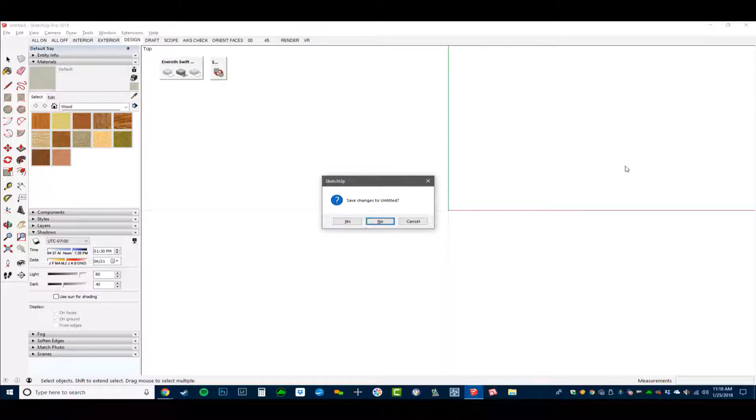Let's hop into SketchUp Pro, and let's see what am I up to. I've got to check my notes here.

All right, so let's open up, I'm going to open a Condoc model. Let's go to our Condoc tools, version 3, resources, models. And we've got this residential new construction. This is kind of a good one.

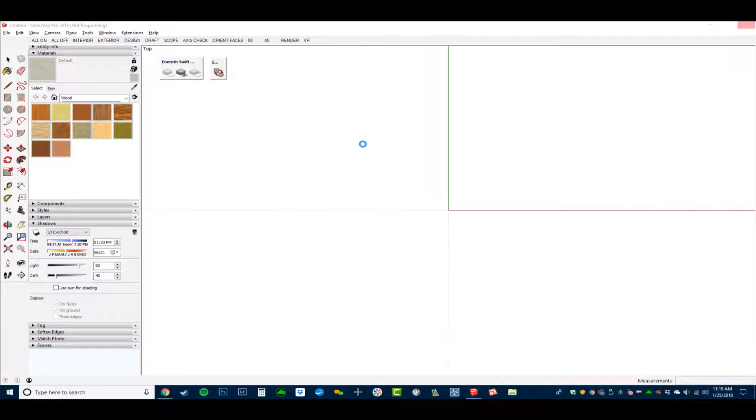You know what, I'm also going to open up another window, and we're going to start off with a demo of Relative Top. I just want to show you what that one looks like. All right, let's get this started up.

Okay, here we are. All right, so the relative top view, and this one was a free one if I remember right.

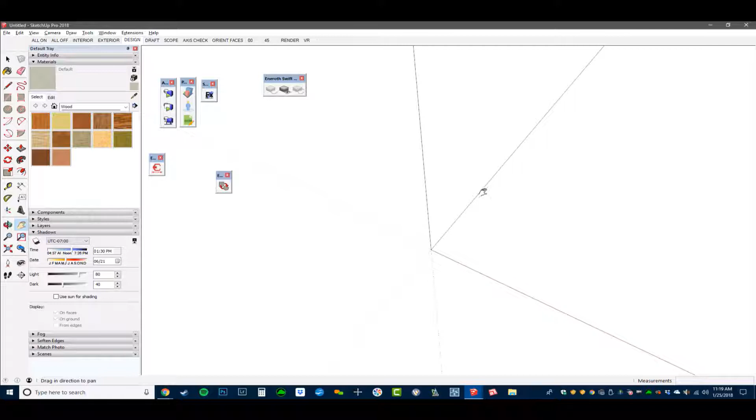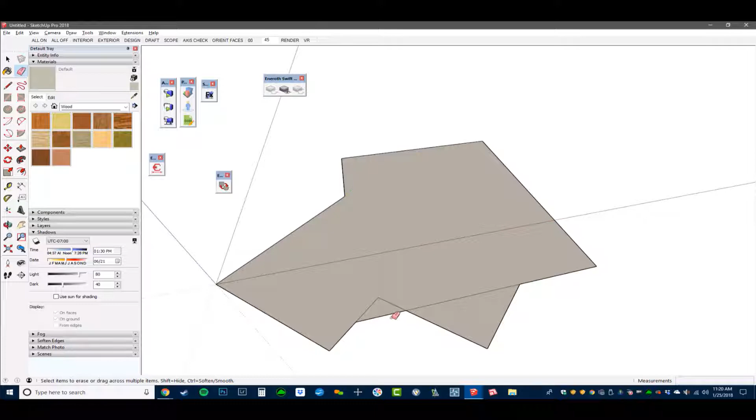Basically what happens is if I start drawing a floor plan like this, and it's going to be kind of masked out like that, and we're going to have a grid shift in here, and put something going on like that, now our plan has all these funky angles on it. And so that's fine, but maybe I want my plan to line up here. If I go to camera, standard views, top, the green is always north, and it's always plan north, so your drawing is always going to point to the top.

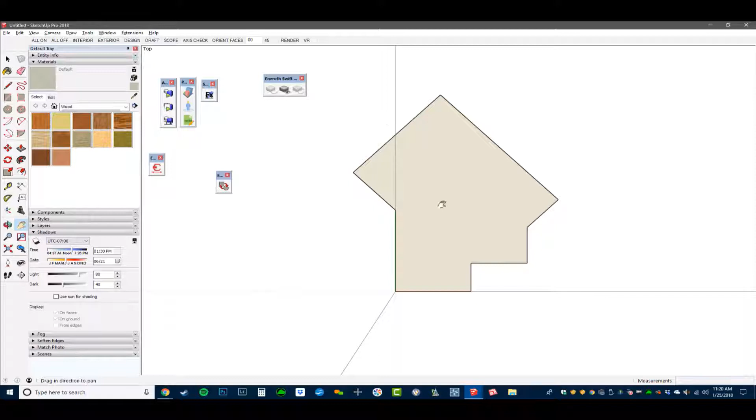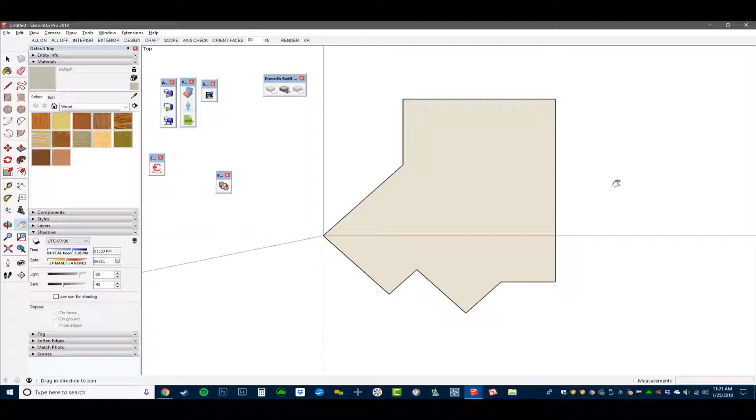Now, what if I want this to be on one of these different sides? Well, the way you would do it in the past is you'd right click and choose move and rotate about the blue by 45, and then right click and choose align view. Now you've aligned your view with that. That's a mess, I don't want to do that. That's even when I know it's 45 - what if I have some really weird angle here? I don't even know what that angle is. So let's just pull this up like that.

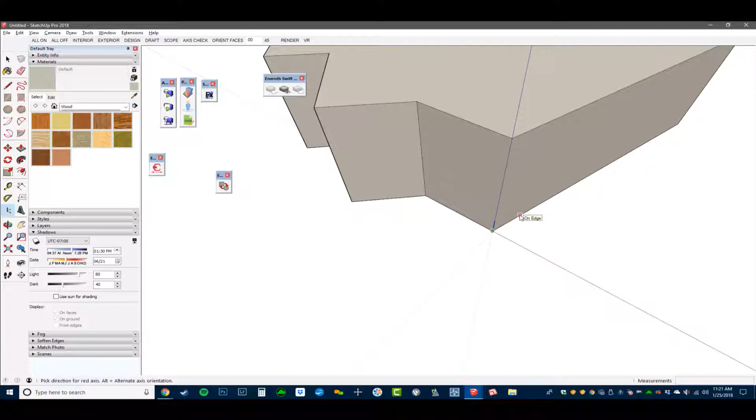All right, so then the other way we would match this is I'd go to my axes tool and set up my axes so that green - see, I messed that up just like I said - so I want to set up my axes to be in line with this face, and now I can right click and choose align view, and now I'm set up in plan. That's just a real hassle, to be honest with you.

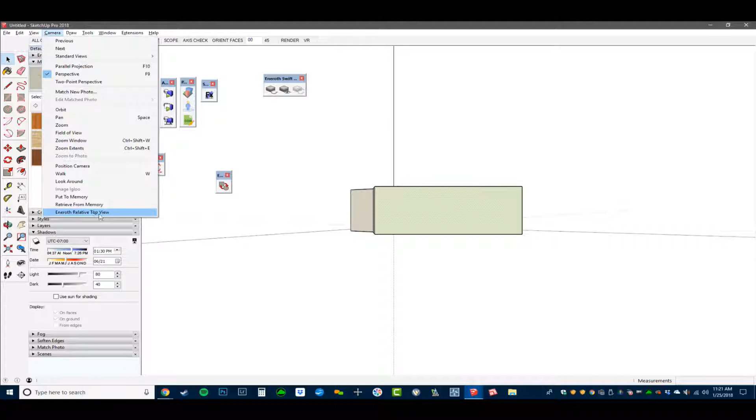I'm going to reset that. I don't want to think that hard. So what I do is I right click and choose align view, so now I've got that perfectly aligned view there. And then I can go to camera and choose Eneroth Relative Top View. What that does is it flips my camera right over, and I'm good to go on my parallel projection.

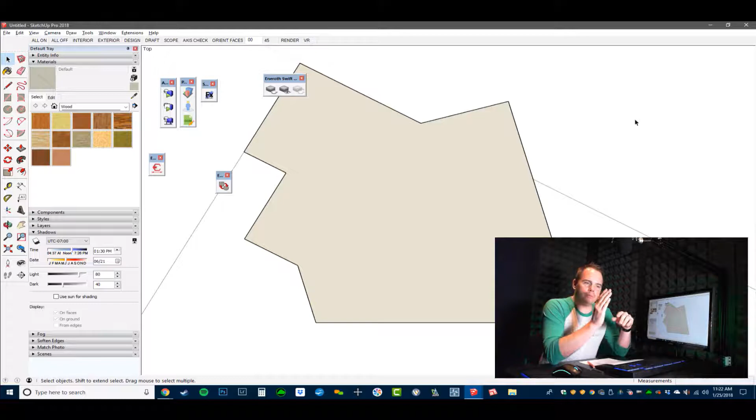At this point, I can add my scene and set up my plans, or if I'm working in Condoc, Condoc works off that default drawing context, so your green is going to point up. Maybe your plan is askew. Well, this way it's really easy to get to that view and then update all of your camera views in all of your different plans. So that's a really handy plugin, one I'm going to hold on to for sure.

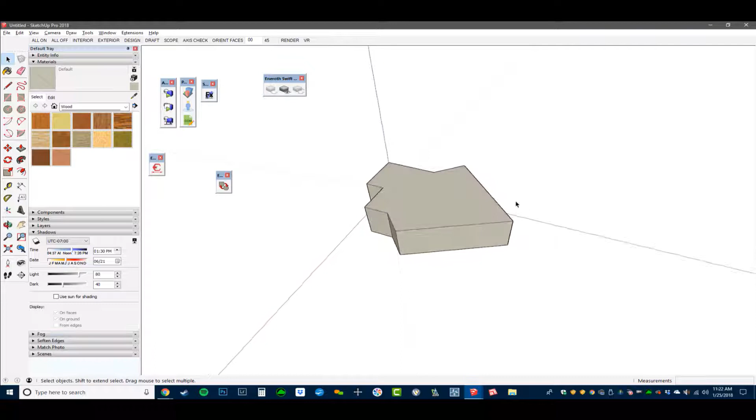All right, let's see what else do we have. Let's see, extensions. Oh, let me install my Condoc extension here for just a moment. We'll do extension manager, install, and v3. There we go, I'm always switching versions here. And like that.

Okay, cool. All right, so let's see, what's next? I want to look at Swift layer visibility. And let's see, I should just take one quick moment and look at the chat panel, make sure that everything's going the way it should be. All is clear, perfect. Okay, I'll go through these here in just a little bit, but for now, we'll keep on going.

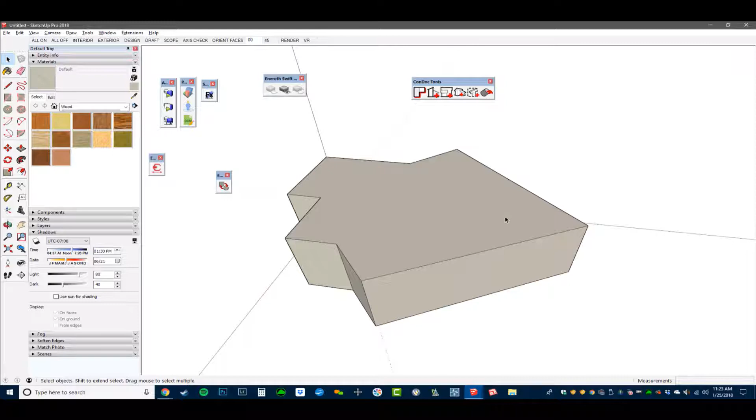Swift layer visibility, this one is $10. This one is really cool. All right, check this out.

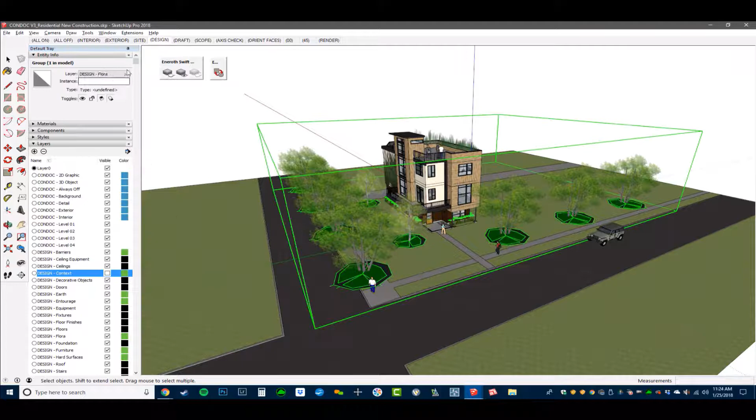If I go in here, here's my context, right? If I look at my entity info, the way that the Condoc system is set up is that we have our design context layer, and we have design flora, right? So I've got to click on it to understand it, that this object is in this group, and the layer assigned to that group is design context. Now, if I want to turn off that layer, I actually have to go into my layers panel, and I've got to go, okay, design context, and turn it off. And then I've got to click here and say, okay, yeah, that's design flora, click here, turn it off.

All right, so what this Swift layer visibility does is I can click on an object and then just push this hide button, and it turns that object's layer off. All right, so that's the first functionality.

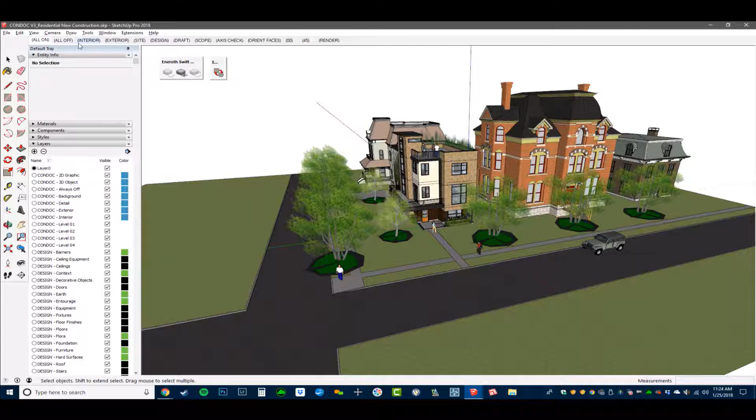So watch this, I'm going to go to all on. These are our layer states, so this works very, very just right in line with our layer states and everything that we're doing with Condoc as far as layering goes. So basically I click here, and then I just click on this hide button. And look what it did, it turned off Flora. I don't care about that now. I don't need to dig around in my layers panel. And I can go click here and say, yep, Earth, turn it off.

Now this is different than hiding. Think of hiding something, you get a similar effect if I hide something, but the issue of hiding is that it's more of like a utility or a tool. It's something to kind of help you move through your model, it's not like a permanent fix. And that's where layers come in. Layers are like the tried and true perfect way of organizing a model. So really, hiding things is like you're going to hide and unhide as you're working. Layers is the way that you fully control your model.

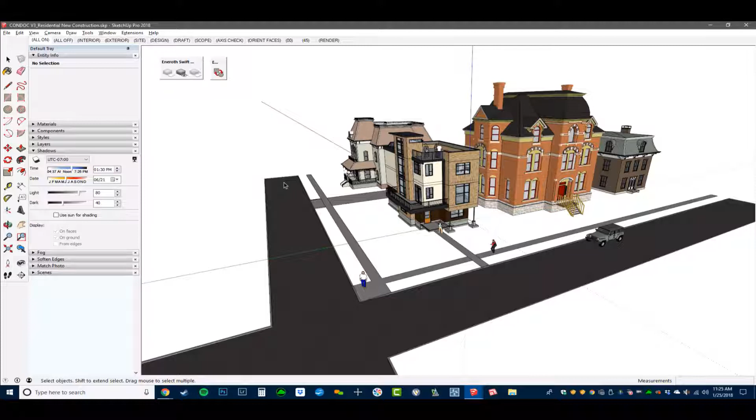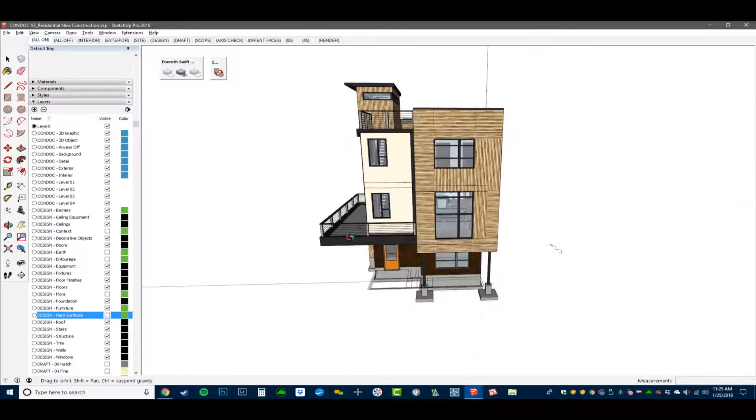So click here, hard surfaces, you can click on context as well. So I picked two different layers, and check this out, I'll open up my layers panel again. And when I hit hide, you can see it turned off context and it turned off hard surfaces. So really easy to kind of get there where you want to be and just work on what you want to see here, all right?

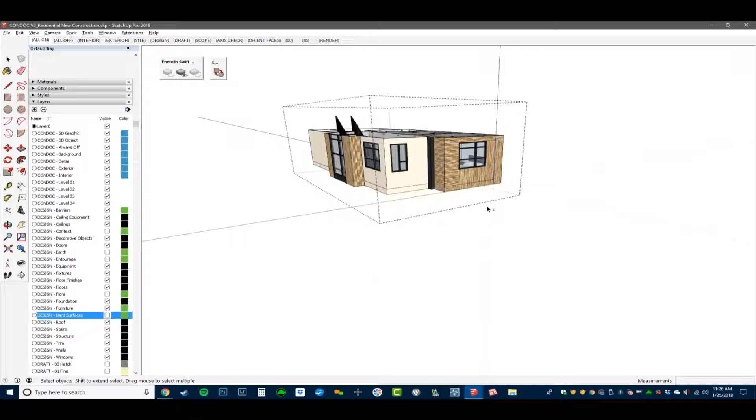Now, the other thing it does, and this one, as far as demoing goes, I might muddle through this because I'm just really, it clicked for me just about 2 hours ago, the real value of these other buttons. So basically what you can do, if I double click in, I like to use hide rest of model, all right? So I use that a lot. Let's just click here, let's click on, this is our walls, and I'm going to hide my walls. And then I can use hide rest of model to isolate the rest. And then I could say like, I want to hide my windows as well.

And what that's doing is, those layers are kind of trickling through all of those different levels. It just helps me control those layers, get inside my model, get to the layer I want.

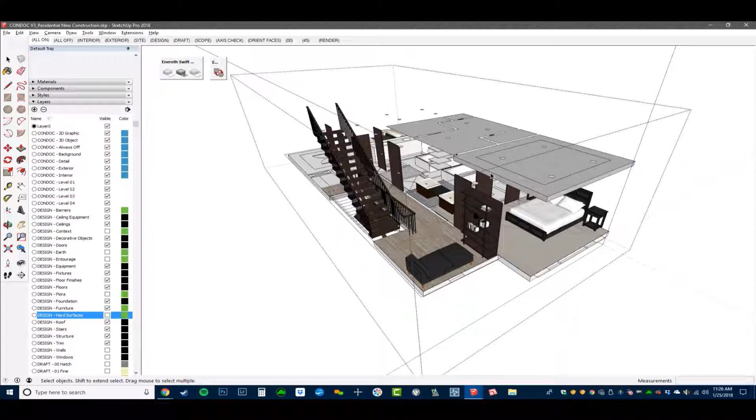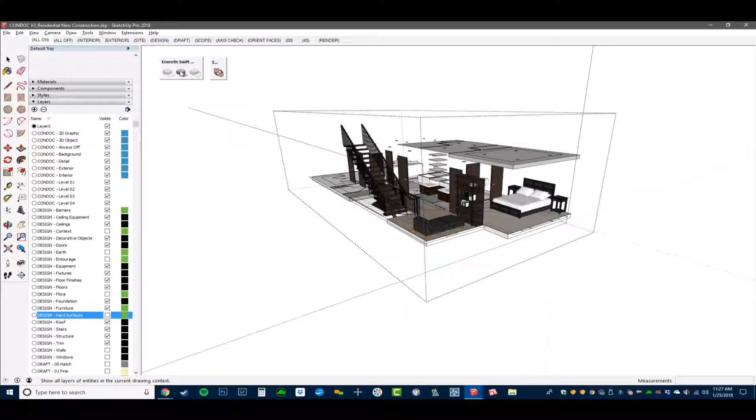Now there's this other function, let's see what this button does. We've got a lot going on with my graphics card right now so it's not showing the prompt right, but I'll do this from memory. Basically, it's going to unhide all of the layers used within this drawing context, which is this group I just double clicked into.

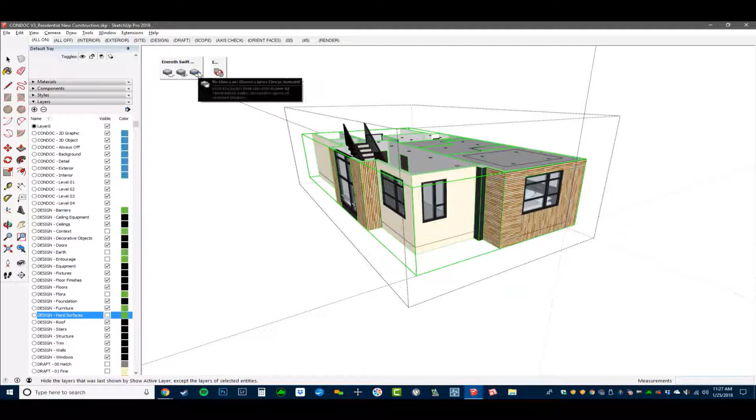Now let's say I actually did want to work on my walls. I click on my walls and then click on this button. What this does is it rehides everything that was shown, except for what I selected. So now it rehid all of those other layers, but kept the one I selected.

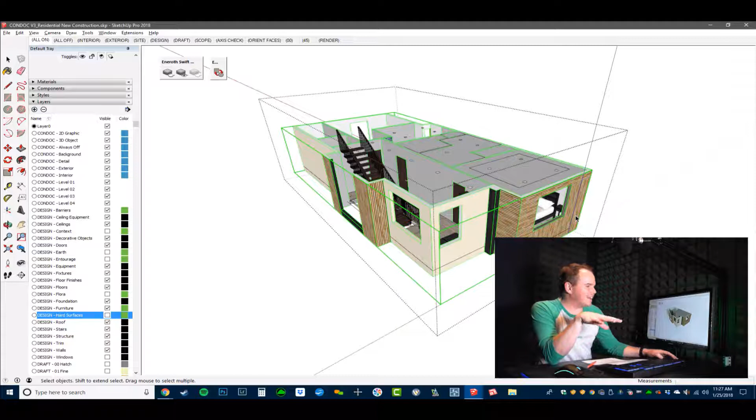It probably takes a little practice to get used to, but Christina mentioned this changed the way she works, and I can see how that would be true. This is definitely well worth the $10 just for this one trick. I'm psyched about this one.

Let's do this. Let's go to Window, Preferences, and our shortcuts, and let's see if I type in, I'm guessing it's like hide layer. Yeah, there we go.

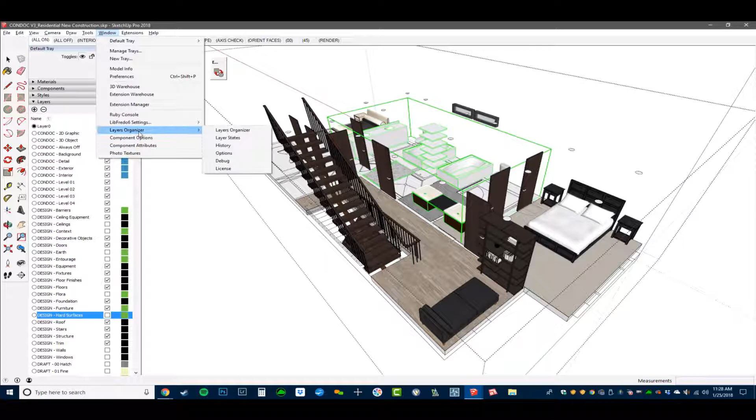Let's see if I can expand that. So hide, rehide, let's see what this tool is called. I've got to look up what this command is. So hide selected layers, let me find that. I'll just search Eneroth. Window, Preferences, and Shortcuts, and let's see if she put her name on here. Okay, hide selected layers, all right.

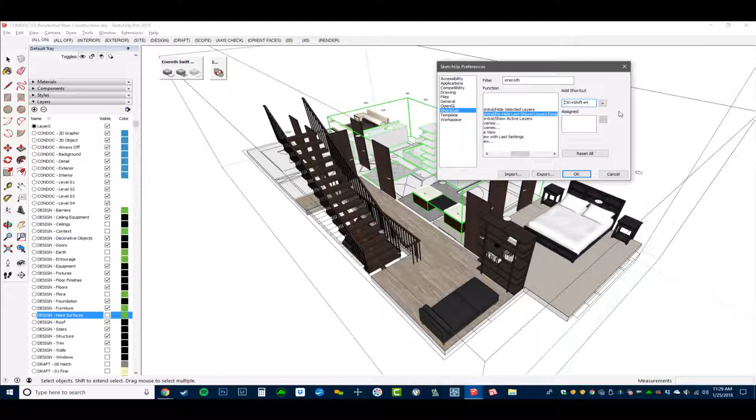So for layers, when creating my shortcuts, I'd think of L, but that's the line tool. So maybe I'll just do Control-L for now as my hide. We'll add that, and then show active layers will be Shift-L, and add that, and then the other one is Control-Shift-L. So two modifier keys, everything's on L, and we'll say OK.

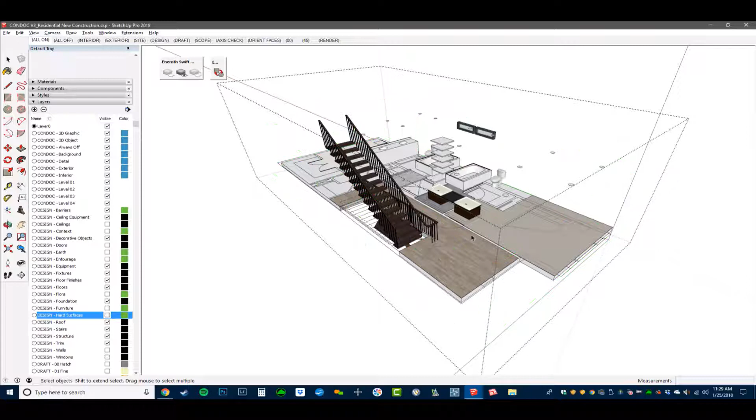All right, so I can do Control-L, Control-L, Control-L, and then Shift-L, select something, and then do Control-Shift-L. Maybe that one wasn't hidden, let's try that again, unhide everything. And let's see, Control-L, L, L, L.

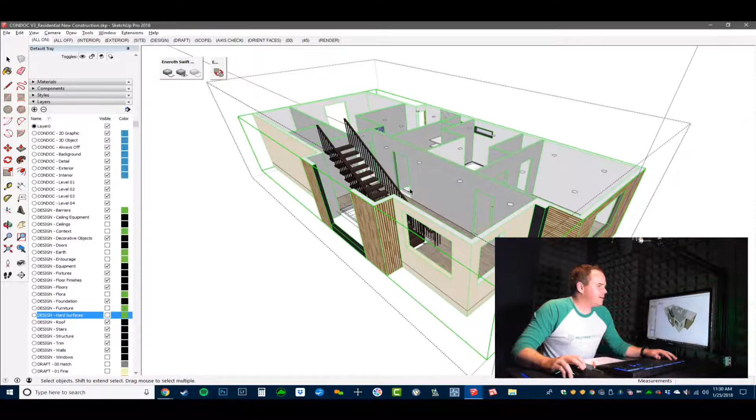And one more, okay, now I'll do a Shift-L. I'll select my walls and then do a Control-Shift-L. I don't know, maybe I'm doing something wrong here, rehide. So anyway, I might have grabbed the wrong tool, but either way I'll goof around with that more. Honestly, that Control-Shift-L thing I was trying with this last piece, I'm really more psyched about just the ability to hide these layers.

That's killer. So anyways, give that a go, it's well worth $10. So anyway, that's Swift Layer Visibility. All right, let's try another demonstration here.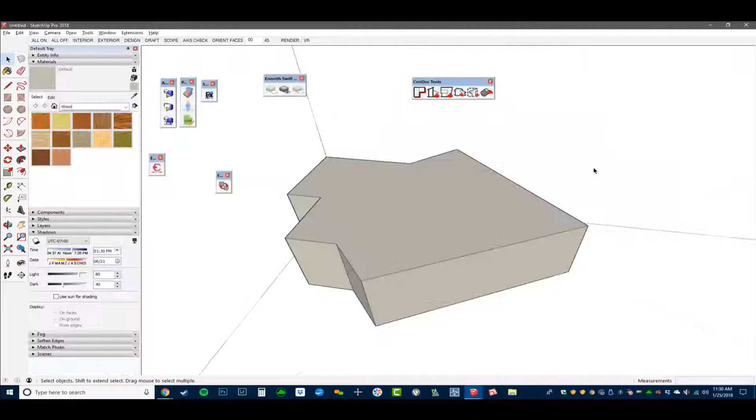Let me just start a new document. For this one, we're going to use our Fractal Terrain Eroder. I came up with two different demos: one involving a block wall, and the other making a cave or grotto. For the first one, let's build up our block wall.

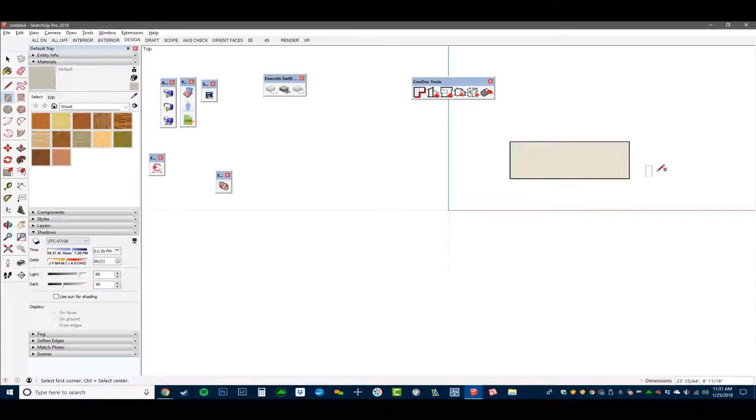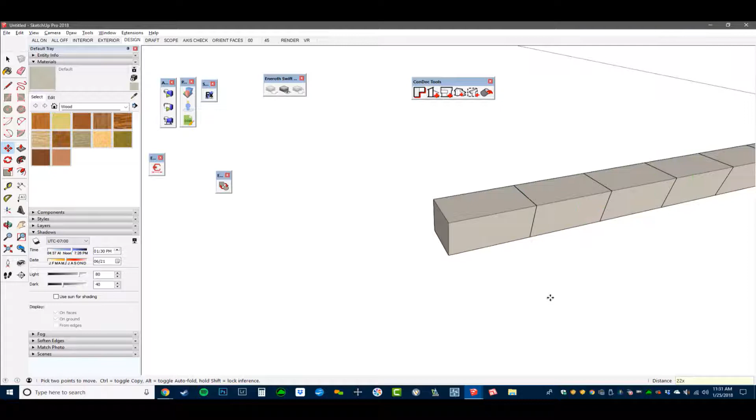Let's go with 8 by 16, I'll type 8, 16. Then we're going to pull this up by 8 inches, like that. Then I'm going to take this block and make it a component, I'll name it block, like that. Then I'll make a copy of it, let's say 16 inches, 22 times. And then I'll take all of this stuff and make a copy of it, like that.

And then I'm going to take that entire deal there and make a copy of it straight up. We're going to do that like 10 times. All right, so we got this big block wall made out of components.

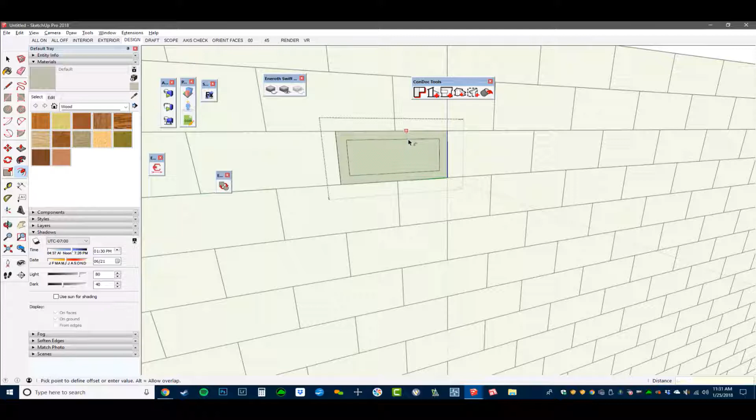Now, with these components, what's kind of cool is I can double click in, and I can offset this. I'll just say like 0.25, an exaggerated mortar line there, and then push it back by 0.5. That way we can really see what's going on.

All right, so now we've got this block all set up. Now check this out. If I want to do a split face block, I'm thinking through how would I render this, or if I needed a really unique block texture. You get those smooth face blocks, but then there's one that looks like they're kind of split and rough. So this Fractal Terrain Eroder is perfect for that.

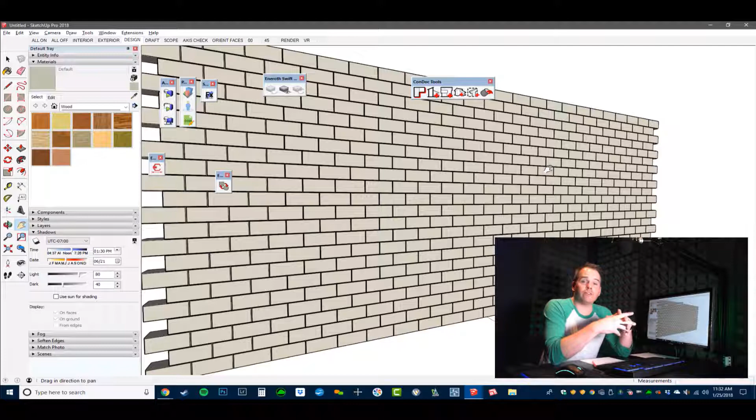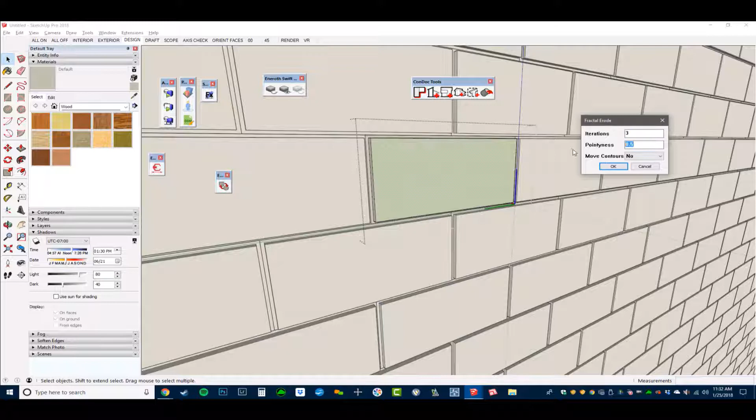So what I'm going to do is, rather than making them all split face, I'm going to double click in and right click on this and make it unique. All right, so this is our unique component. I'm going to double click in, select this, and go to extensions, erode. All right, I'll hit erode, and let's do 3 iterations at pointiness 1, and say okay.

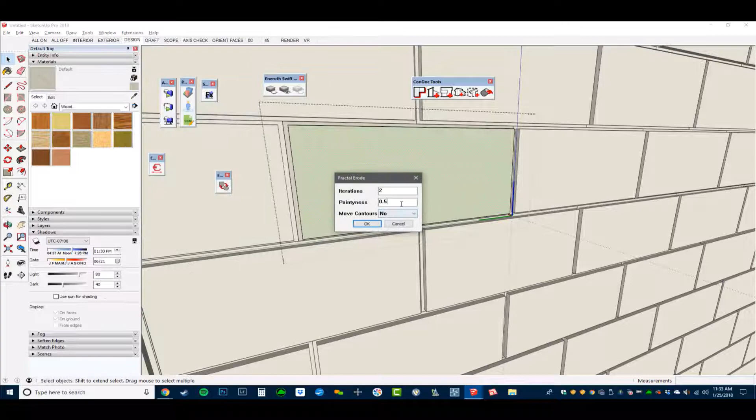Look at that, what it did is it made it jagged, kind of split face. Maybe that 1 was a little bit aggressive for a split face block. So I'll go back, hit undo, and just hit erode, and we'll do 0.5 and 2 iterations and say okay. So check that out. That's the easy way to get that kind of eroded look to it.

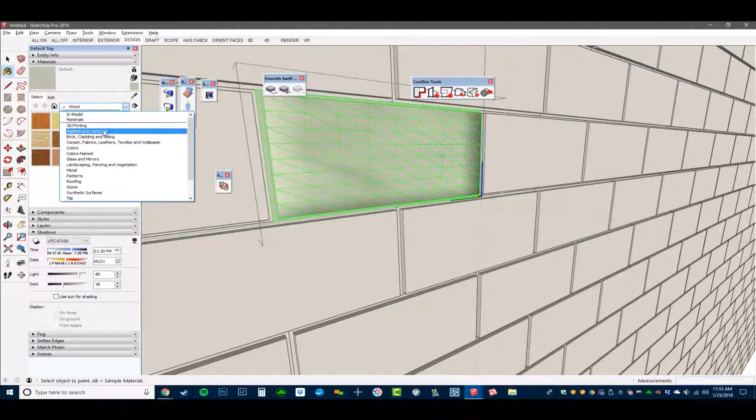Now, so we've got our one split face block there. Let's paint this one. I'm going to paint this with our concrete, like that, and then I'm going to use a darker line for this just to see something else going on. And then I'm going to use the same thing here, paint that.

Like that. All right, so you can see we've got our split face block here, and you can see your hidden geometry like that.

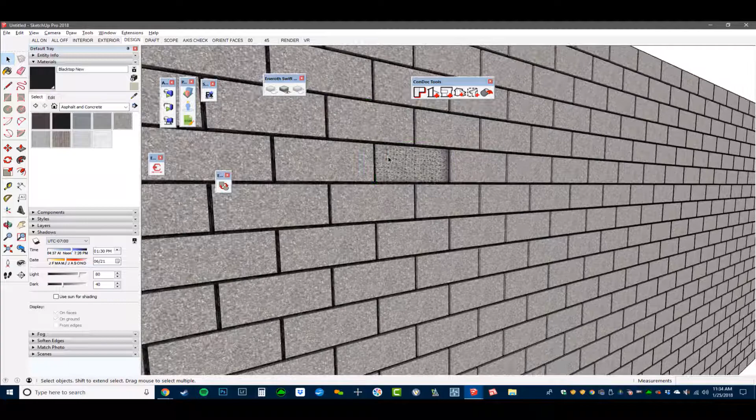Now there's this other plugin, this component replacer. I don't know if this is like a normal thing for making renderings, but I could imagine if this block wall were the highlight, this would be a killer use for it. This component replacer basically does paint bucket behavior, or like our match properties tool, that type of behavior where you sample one thing and apply it to the next.

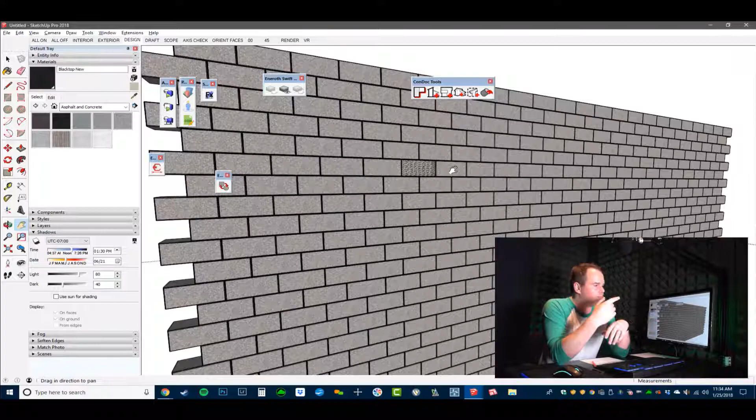It works with components and replacing components. So if you have different chairs, you want to click and swap them out, or in our instance we have this block wall, and now we have this perfectly eroded split face block. All right, so maybe what I want to do is activate this component, the Eneroth Component Replacer. I click on this one, and then I can just click and start swapping out these components.

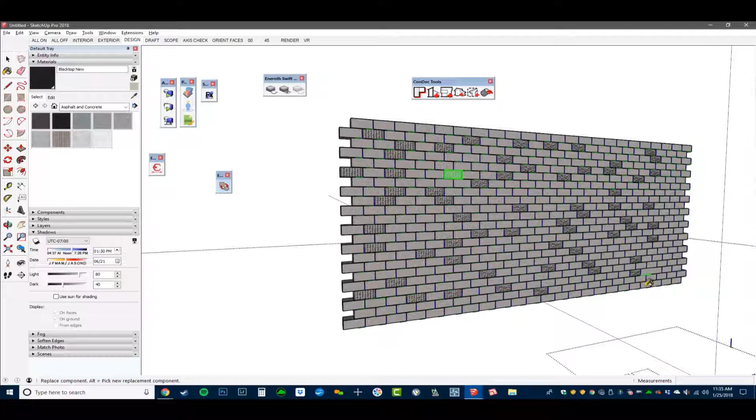I mean, that is so much easier than doing any sort of move, copy, or right-click reload. You can kind of get the look you want for this block wall so quick and easy. Let me make sure, yep, see, they're all linked. So that's really cool.

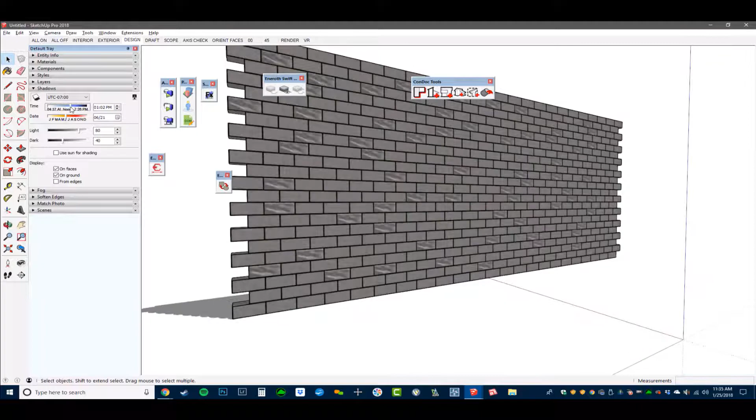Let's turn our shadows on, and now this is in SketchUp where the shadows aren't all that powerful. Where you bring this into something like Lumion, all of a sudden you've got some really nice shadows and realism going on. I mean that's pretty cool.

All right, so that's that component replacer. That was a paid plugin, $7. So I could imagine using that with trees. This example here is with furniture, but also landscape and shrubs, and just being able to quickly reload things without right-click reload.

Or actually what you would do is you'd have to right-click, make unique, right-click, reload, track down the file, and then say okay. It saves all those steps.

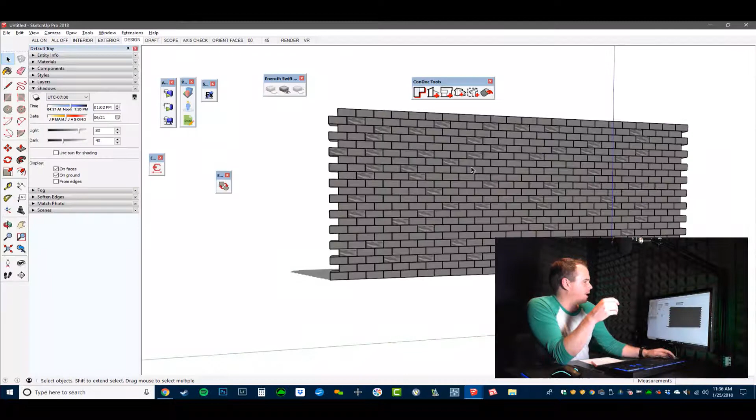Alright, let's take another look at the Fractal Terrain Eroder, and that one is free. Let me show you how Luke ended up making this waterfall, but this is my interpretation of it.

Let me see, I know I have a really cool image here. Let me open that up. So, Dropbox, presentations, and our 18.

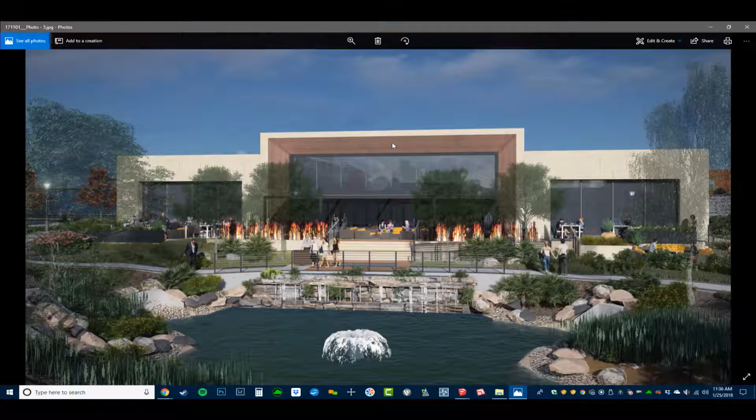Okay, cool. This is a rendering we did, and this was kind of a quick project. This waterfall that we put together was a challenge to get the look right and to get the boulders in place. Given the constraints of the project, I think we did a really good job getting something together that was much clearer, after a couple revisions.

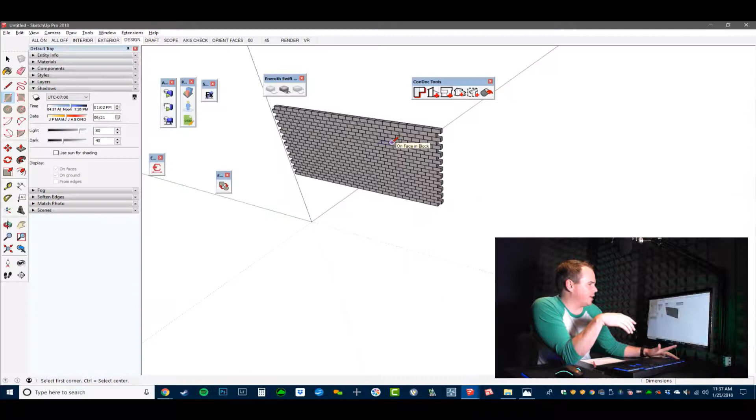So I want to show you how to create something along those lines. Alright, over here, let's see - if I want my waterfall to be like, let's call it 5 feet, 20 feet, enter. I'm just going to pull this up a little bit and sketch this waterfall out.

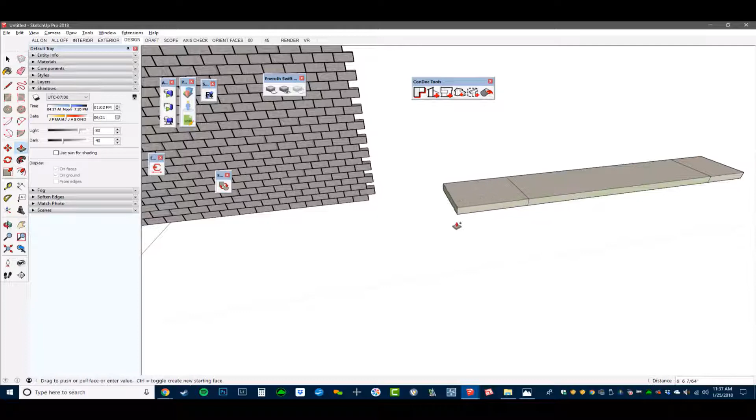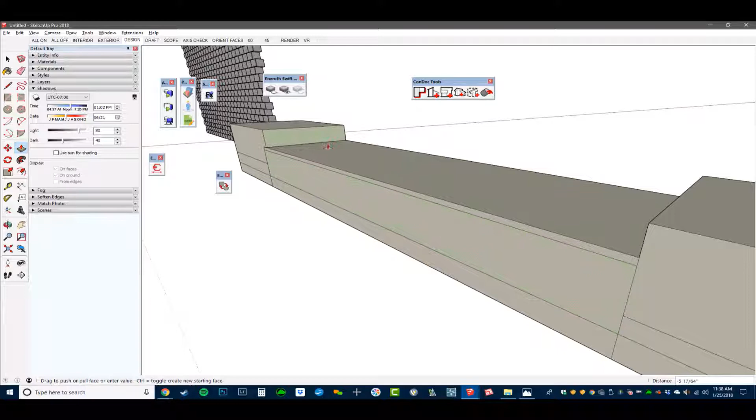And we'll use varying levels here. This middle one will be our kind of plate that hangs out, and maybe I would do, let's do this, I'm just tapping control with the push-pull tool. So we're going to get something going on in here, like a stone going on there. I'm just kind of massing out the general form of my waterfall.

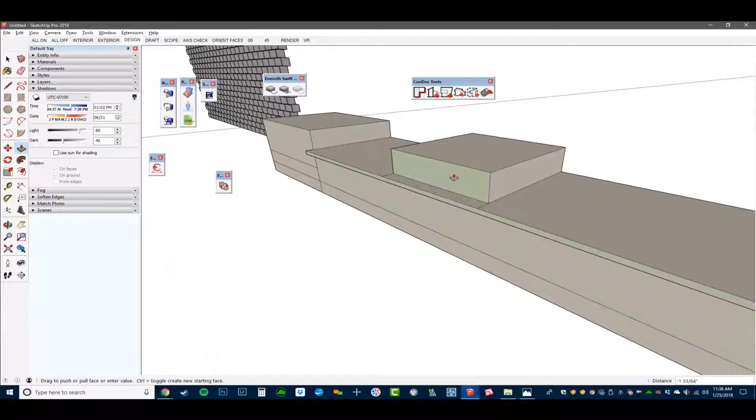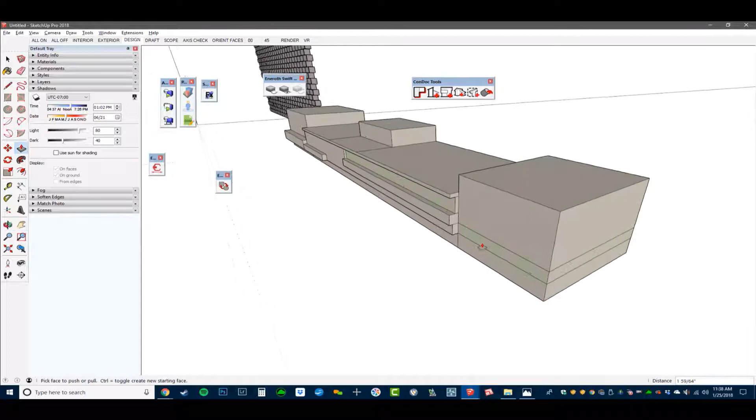Then what I would do is, alright, this is where I want my overhang, and maybe that one goes in a little bit. This one can be like these different pieces here, pulling these different things out, like that. So I'm just trying to get those different pieces stacked in there. I don't know if this is even the best way to do this, but whatever, we'll stick with it.

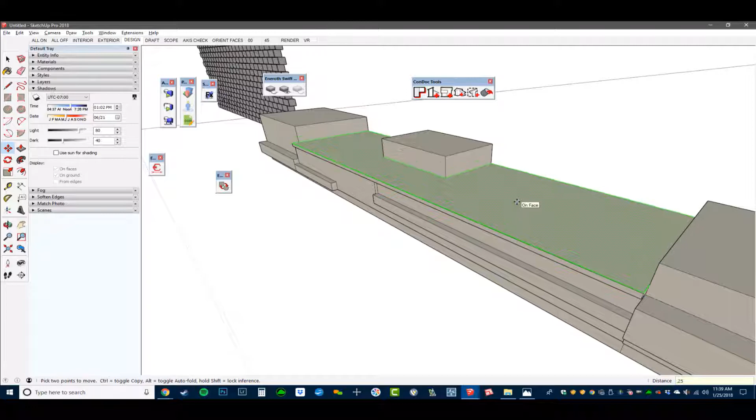Alright, so we got this rough shape created, and maybe this would even be a good time to take this and make a copy of it up by 0.25, group it, and hide it. Alright, so we've got it sitting there for the time being.

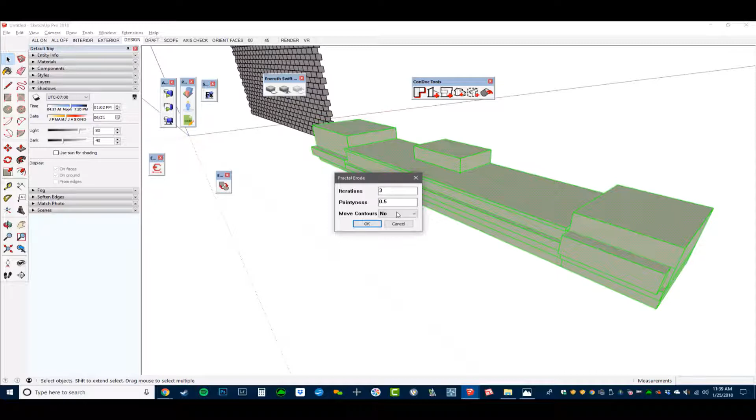I'm going to intersect my faces with model. Alright, so basically I'm just going to take this whole thing and erode it. Extensions, erode, we'll give it 3 iterations, and then 0.5, and say okay. There we go - so it just takes that one form and very quickly rolls it and changes it and mashes it up.

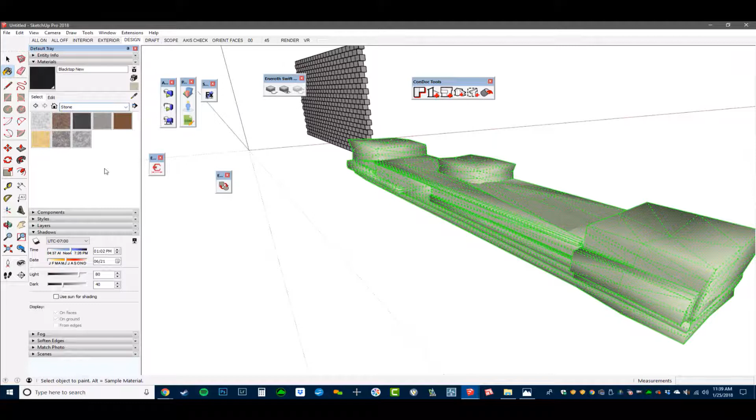Those are really difficult shapes to make. And now I could just take this and paint it. Maybe I would use a stone. I'll bet if we would have gone in - let's try that actually.

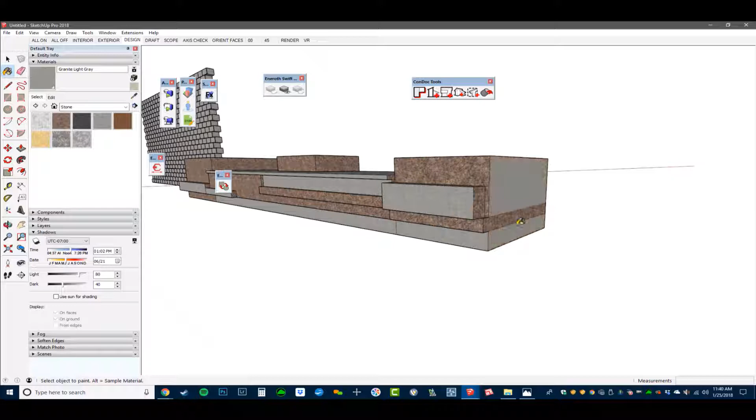That's kind of what we're here to do - I'm going to paint, we'll paint all this with granite brown. Then I'm going to paint some of this stuff with a different one, let's see if that gives us the look we want, like that. We'll just do a couple. Alright, and then let me grab one more, like that. So that'll be like a featured boulder, like that.

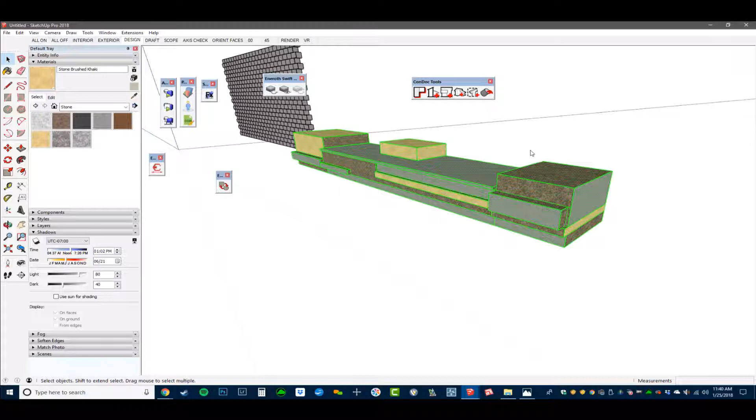I'm just curious what the textures are going to do on this. Alright, so we'll go to extensions and choose erode, and again we'll do 3 iterations. Perfect, yeah, that's really just very quickly trying to knock something out.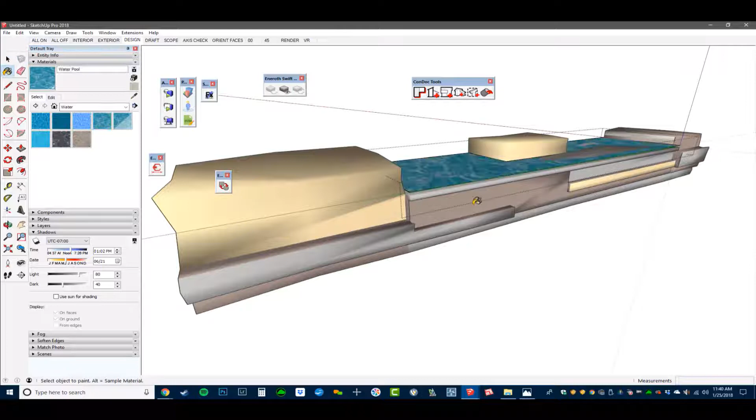And then I would just take this and move it straight up. Maybe I would have deselected that one plane, I guess. But anyway, what I'm getting at is that then this, we can go to our water and paint that. So now that becomes our waterfall, and pretty cool.

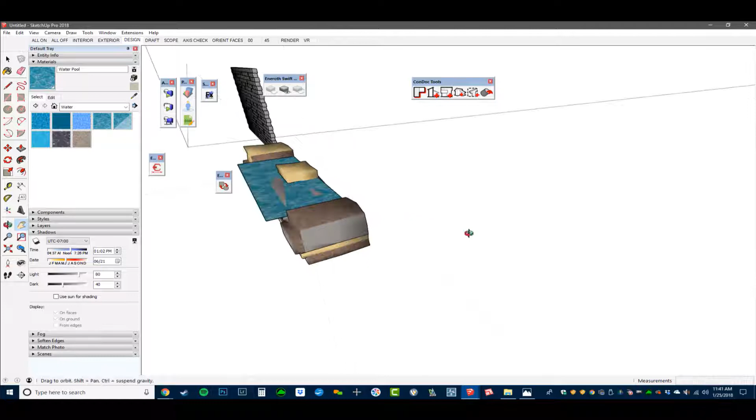So that Fractal Eroder, that was a pretty handy tool, and creates a lot of tough geometry to make. I guess the other thing - I did say I was going to do this. We're getting close on time here for sure. This is another example. I don't know if I'm in love with that waterfall I built, but anyway. So if I pull this up, let's try something else here.

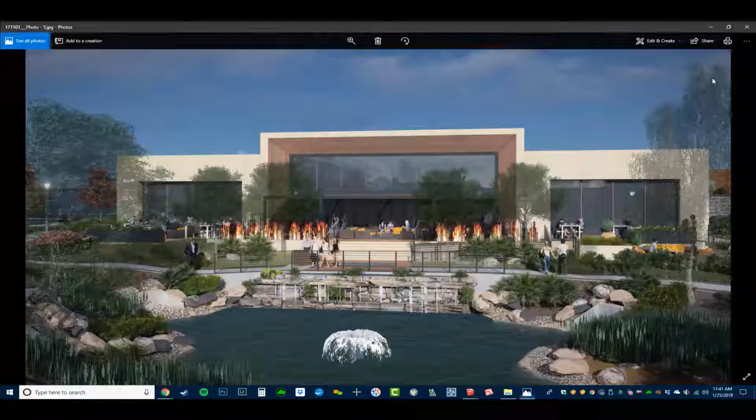I'm going to get all this stuff out of the way. We're hiding. Just auto-saving or something here for just a moment.

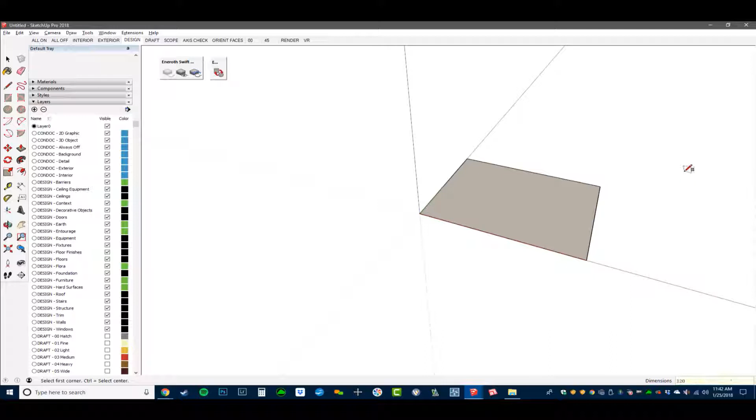Okay, so let's do this. I'm going to draw like a 120 by 240, so a 10 foot by 20 foot cave. When I was working on this, I was thinking of like miniature golf courses, right? You've got these funky caves, and how do you even do that? But with this tool, it was pretty slick, so it's kind of a fun one to play with.

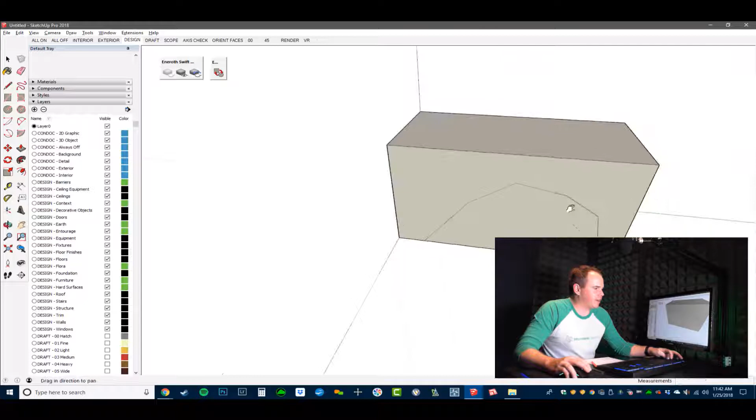I'm just going to hold shift on that surface and create the outline like that. And then maybe I'll put another outline over here like that. All right, something like that.

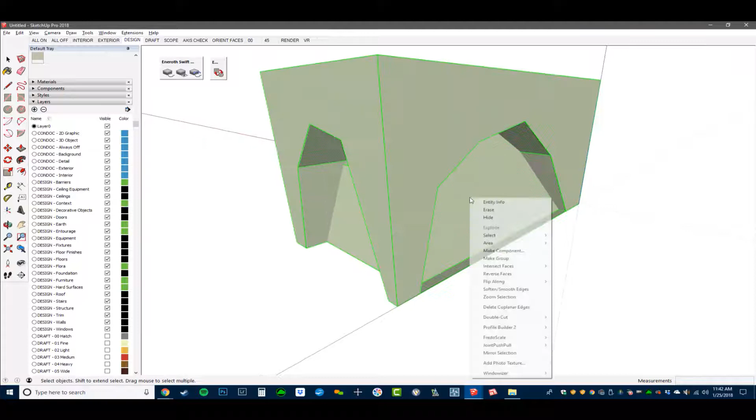And then I'm going to push pull this all the way through. And then I'm going to triple click and intersect my faces with selection, and then carve that out. That's kind of how we hollow this thing out. Like that, like that.

All right, so now we've got like... nope, we need that, so I think we're good there. That's kind of the general form. And then what I would do up here is like maybe offset.

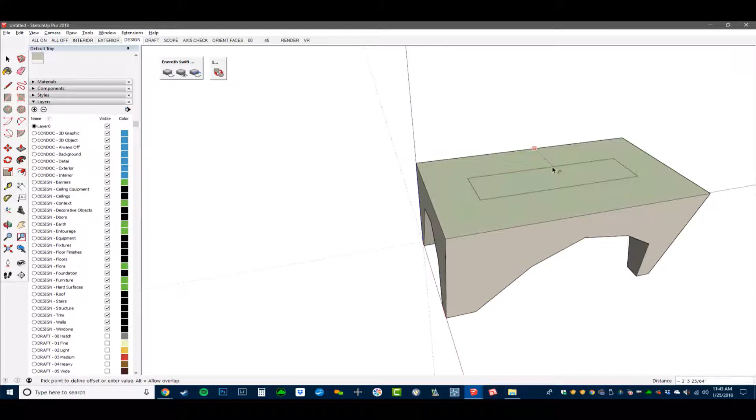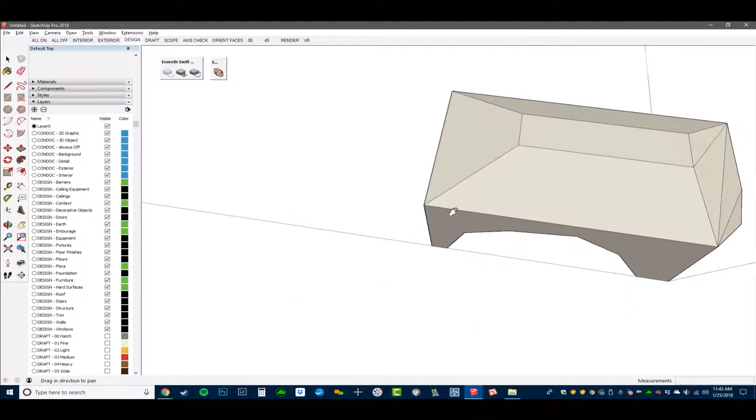Let's see, let's do that. I'm going to use my line tool and just draw a simple line. And then I'm going to use my follow me tool like that. And then maybe just shift this thing, kind of making it not perfect. All right, so we'll do that and kind of bring in these edges.

Do this. Cool. Get rid of that. Perfect.

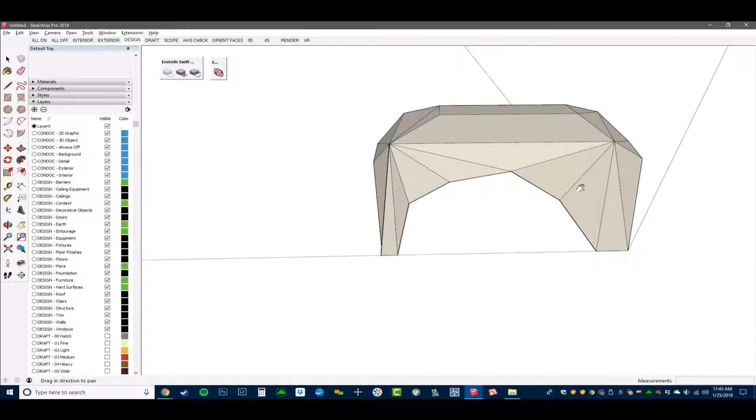So just that kind of simple jagged form, and then I can just take the whole thing, extensions, and erode. We'll do pointiness of 1, and let's do 3 iterations. See what that does for us.

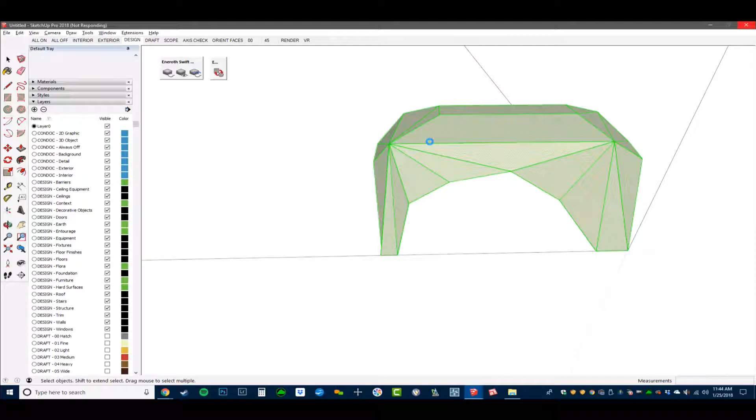Takes a moment, so anyways, while we're waiting for that one to catch up, again I'll just reiterate that these plugins, they do take a lot of effort to make, and so many of them are free. Definitely well worth getting the free ones, and buy the paid ones too.

Check this out. I mean, that's a difficult thing to make. I don't really like that, the way that looks.

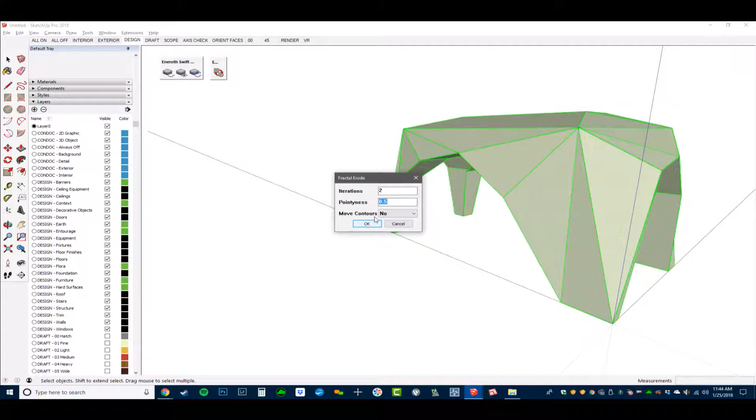Let's go extensions, erode again, and let's just do 0.5, we'll do 2 iterations. That should go real quick. There you go, look at that. I mean, that's such a difficult form to make and make it believable. And that eroder, that's going to come in real handy with a lot of things.